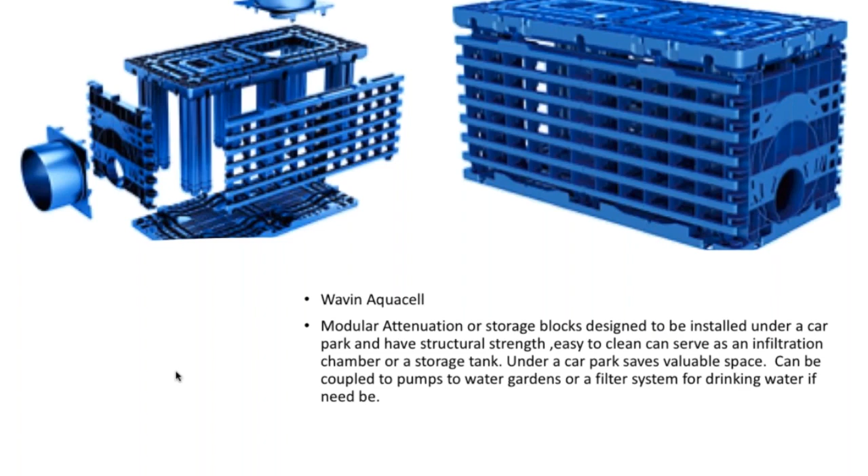What would you do with the water once you've collected it? Obviously, you need to clean it. And there are a lot of people who make very, very high-end and good water filter systems. I know that one of the IOPSA members is a company called BWT that makes very good treatment, so that you can either treat rainwater or sewage back to eventually drinking water, or if you don't treat it quite so far, you can treat it to grey water and use it to flush toilets and wash down areas, things like that.

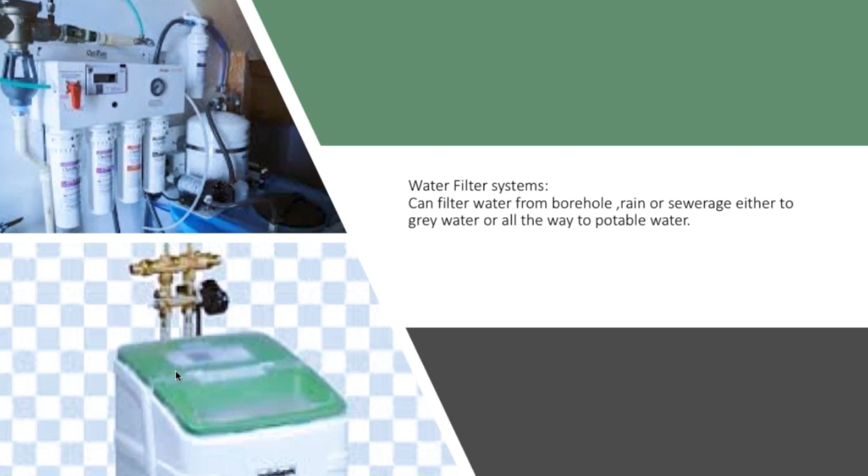So it's just a question of embracing these new technologies and offering them to your clients, because I can tell you that installing a water purification system gets you a very happy client, and the savings and the convenience of having grey water on hand to use to wash down flooring or to flush toilets, that sort of thing, becomes a very worthwhile cause in the plumbing industry.

We also then can offer comfort offerings. Comfort offerings are things like heating and cooling, and making your dwelling space better. So what's becoming very popular in Europe, and to a lesser extent in South Africa, is underfloor heating, but then heating and cooling. So with traditional underfloor heating, we would put the pipes in the concrete slab underneath your bedroom, and we'd pump hot water through it, and you would heat your building like that.

With radiant heating and cooling, we rely on the radiant source of heating, and by putting the pipes very close to the surface, we can cover those in plaster or ceiling boards, and we can make your ceiling board or your wall into a heating or cooling surface. This becomes a very efficient way to run your heating and cooling systems. It takes up very little space.

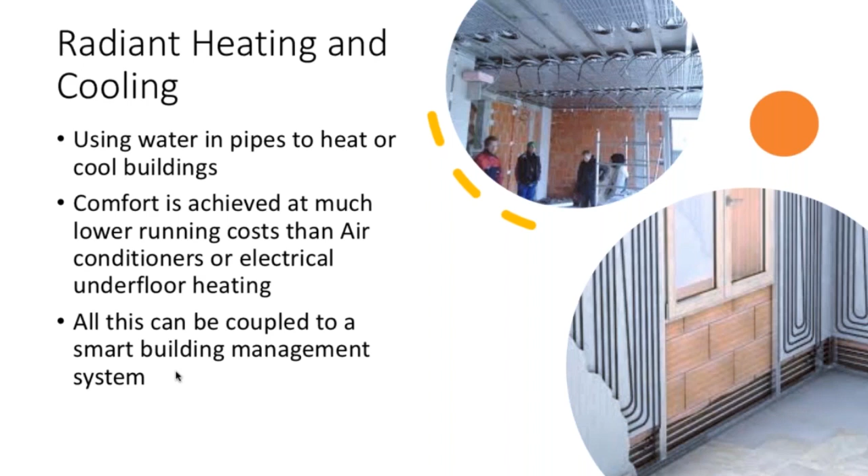It's a very energy efficient way to do it, because we don't have to shift huge amounts of air or water, for that matter, to heat or cool the building, and it gives a very high comfort level. All of this can be coupled to your smart building management system. So once you've got your building management system working correctly, you can turn this on and off. When you're traveling, you can turn it on the day before you get there, and you'll come home to a beautiful cool building or a beautiful warm building, and it all ties in with your smart building systems and is very, very easy to control.

We then also have things like waterless traps. Waterless traps are ideal, especially in very hot areas where they have low usage, because they will never dry out. This particular picture is of a HepvO, and there were 2,000 of these products put into Soccer City, and they never ever get a smell, because when they don't use the building for a couple of weeks between soccer matches or between concerts, there is no water to dry out, and there is no trap to dry out and make a smell. So it eliminates the possibility of a trap drying out, and because of that, it also eliminates the possibility of smells entering the building.

It also is becoming very prevalent, and if you read the news reports about plumbing, they've identified that at the moment COVID is also being dispersed or transmitted through bad venting in systems, because the traps are dried out and because products aren't being used. The pathogens have been able to creep back up the drain and be vented into buildings. And if you do read the news, there are a couple of case studies they're doing at the moment about how COVID and other diseases are entering dwelling spaces through the failing of traps and drying out of traps.

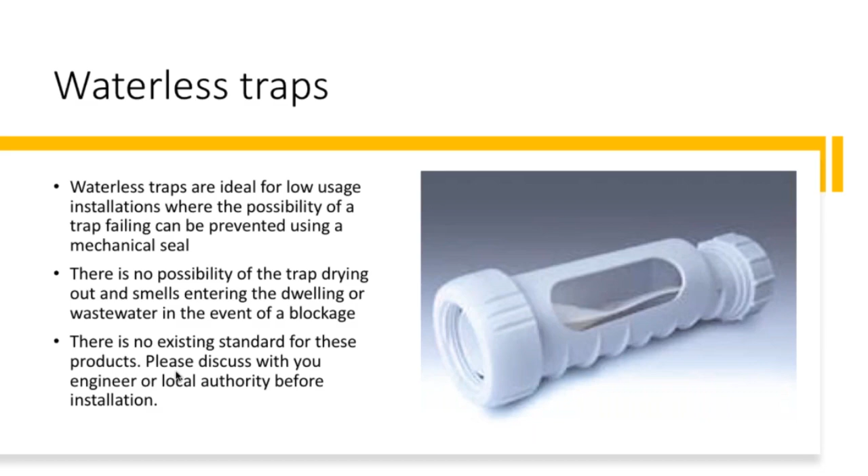As I said again, please guys, a lot of these products don't have approvals, so you just need to discuss it with your engineer or local authority before installing something like this. The next product that's certainly gaining some traction in South Africa is point of use filtered water. There's several varieties on the market at the moment that I've seen in South Africa, and a lot of people are going for this sort of thing in upmarket houses and semi-industrial kitchens.

It's basically a tank of some sort, either installed underneath the counter or on top of the counter, that when you push normal tap water through it, it filters it. Several offer hot or cold options. Some even offer sparkling water as an option, and it's on demand, it's not storing the water, so there's no chance of bacteria growth in the water, and it's a very convenient way of doing it. And again, if you can get into something like this as a plumber, it's an offering that maybe quite a lot of plumbers don't have available yet, and it gives you the edge.

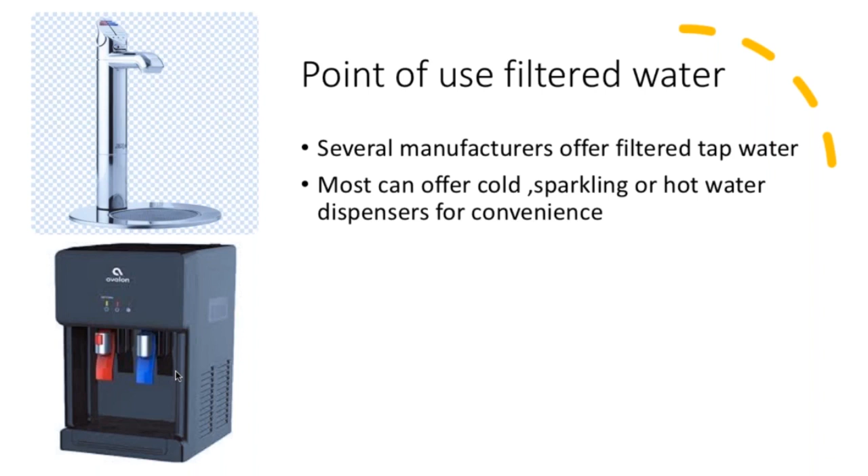If you're a plumber who specializes in kitchens, something like this is certainly something worth looking at as a plumber.

The other thing we also can look at is a thing called a hot water circulation valve, and this valve helps to balance hot water in a building where there are multiple loops. What often happens in an apartment block or a hotel is you have a centralized boiler system, and that is then pumped to all the different areas of the hotel. And because of the nature of water, the easiest loop stays hottest, and the longest or the loop with the most bends and most friction stay coolest.

This valve is installed on the return line of each leg, and when it gets to temperature, it closes, which forces the hot water to purge the next line, and when that line gets to temperature, it closes. So by opening and closing several of these valves in a system at a time, the hot water in the building will all stay at the same temperature, and the comfort of the building will be far better, and you'll have far less wastage of water because all the hot water will be available as you turn on a tap.

In the olden days, we used to use a thing called a balancing valve. We used to have to try and manually balance each loop. This valve now does it all for you. And again, there are a couple of manufacturers who've launched this sort of a valve or very similar.

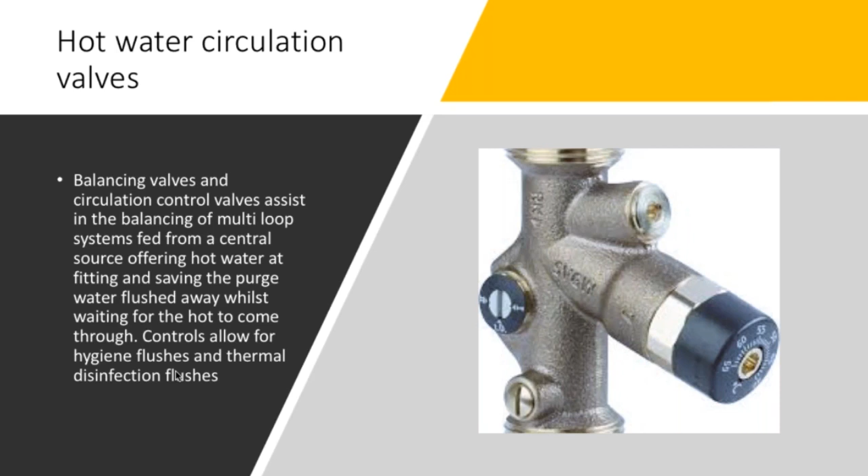And depending on how far you want to go, you can also link this to your building management system, so you can use it to do thermal disinfection. In a hospital, you might want to turn the temperature up to 90 degrees every second day or something at midnight, and these valves let you do that sort of thing, and you can have thermal disinfection happening in the pipelines.

The other sector that we need to look at is repairs and maintenance, and one of the big ones at the moment is pipelining and trenchless replacing of pipe or repairs. I know there are a couple of members of the Institute of Plumbing, and if you need any details, you can definitely contact me afterwards or contact IOPSA, and they'll put you on to the guys who are already doing this. These guys have made a very good business out of this, and it's a very nice thing to be able to offer your clients, and it's really useful if you don't need to dig up paving or chop up tiles in a building, if you can reline it.

And if you look at the picture before and after, you will see that they take an existing pipeline, they clean the inside, and they either spray a polymer or insert a polymer into it, or they can pull a new pipe through in certain places. They can rip out the old pipe and pull a new pipe through at the same time, so you don't have to dig open a road, for instance, if there's a drain underneath it, or a foundation if the building goes underneath. Trenchless repairing is becoming almost a niche in the plumbing industry, and people who specialize in it are very busy.

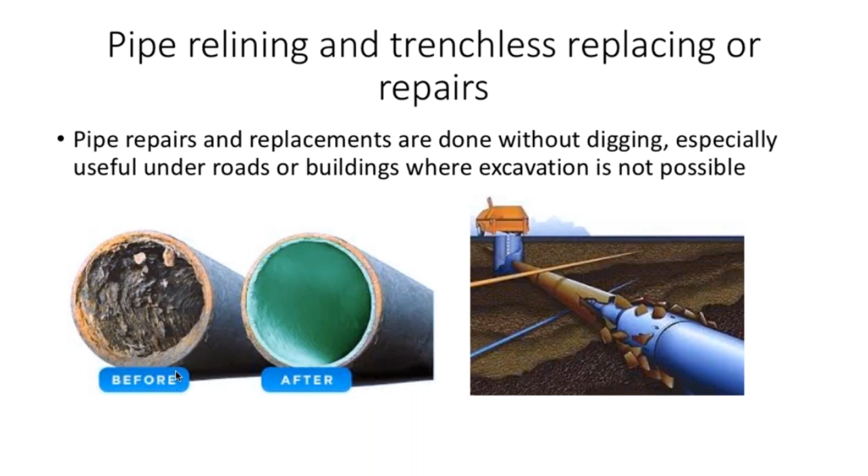The other thing that is also becoming very important, and again, people who can do this can start to offer far more reports and data to their customers, is data logging. With the way the internet and cell phones are going, it's becoming easier and easier to install a smart meter, or a meter that can do more than just measure the water flow. It can log the times when the flow is greatest, when the flow is least, and from that you can start to charge your customers according to when they're using the water. And if you put it onto the hot water systems in a building, you can charge the customers for the energy they're using as well as just the water.

So a lot of buildings have a central boiler, and in the olden days you used to measure hot and cold water, but now we can actually measure the temperature coming in, temperature going out, and the time they're using it, and you can allocate times so that you can try and balance when everybody's showering or using hot water in an apartment block, and charge them more at peak times and less at lower times, which then creates times for people to shower and make sure they're using the hot water at a more balanced time.

And ultimately, you can also then set your boilers and your heat pumps so that they are creating the hot water at times when you need it and not wasting energy by creating hot water at times when it's not getting used. In Europe, they measure the water going into the building and out of the building.

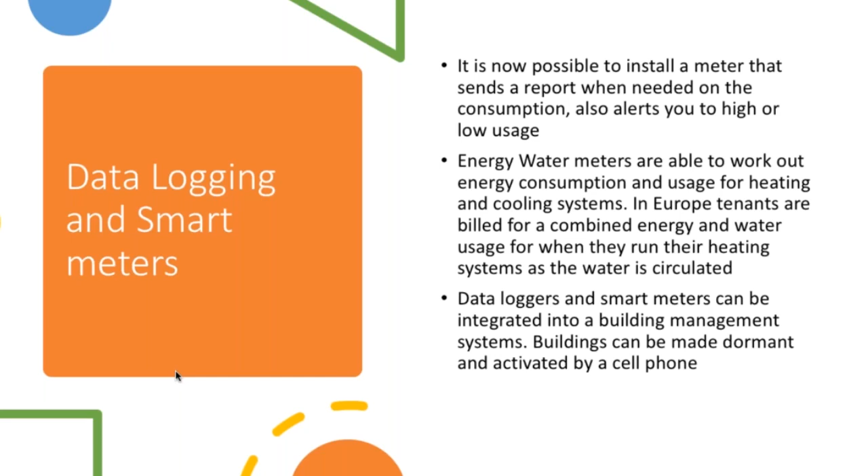Then all of this has to be brought together, and the way that architects and designers are bringing it together is with BIM Revit modeling. So building information modeling is the new way to design buildings, and in Europe by 2021, all public buildings will have to be BIM designed and modeled before construction commences.

My brother is in the architectural industry in the UK, and for every single building they have to give a full walkthrough with their clients with BIM Revit, and they can even plug in the GPS coordinates and let the client know when the sun will be shining on a certain part of the building during the day and in the afternoon and that sort of thing.

But BIM also lets designers use the correct dimensions for the product. So if you're a pipe supplier, you will create BIM objects of your pipe, or if you're a toilet supplier, you'll create BIM objects of your toilets, and it'll be down to the last millimeter, and the architect can then place your toilet in the building with the tiles, with the pipes and everything, and check from a dimension point of view that everything fits perfectly.

With your pipes, you'll be able to put your pipes, the air conditioning pipes, the electrical cables, everything into the duct, and they will be able to ensure that everything fits in the duct before they start working. And if not, they can redesign the duct to make sure that the duct or the wall, whatever, will fit it. And the client can do a full-on walkthrough and check that everything's right.

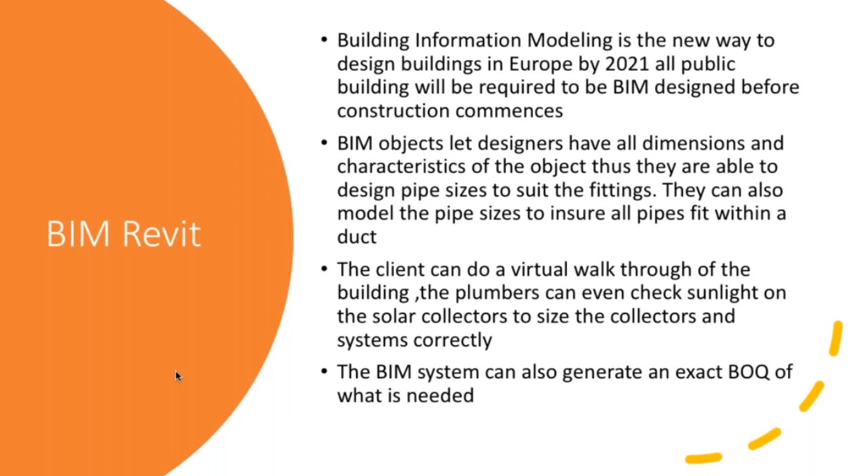And also, if there are changes in the building, you can change it on the BIM Revit plan, and it'll help your plumber and everybody fit in with each other. Down the line, you will have picked up the problem before it becomes a problem. This is just a couple of pictures that I've taken off the internet, so you can see how it designs and how it will work out.

And it'll even, with pipe, for instance, when you've had to use reducers, work out what reducers are available in the catalog and put the reducers in so that the reducers fit and work correctly. So if you're doing drainage and you need to go from 160 to 50 mil, it'll put the 3 reducers in that are available in the catalog, and it'll design it like that, so that when you come to do the BOQ takeoff, everything will be exactly right, and it won't just be one reducer. It'll be the number of reducers you need and the angle of the bends and things like that you need. BIM will also stop the designer designing products that don't exist.

So when he comes to do a bend and he needs to do a funny angle, it'll only let him use the products that are available. So it'll be a 45 junction plus a 22.5 bend, whatever it is. It'll let him use the bends that are available. It won't let him design an angle that's not available.

It'll break it down to the number of fittings you need. And then you get a very accurate finish up at the end, and it makes the plumber's life very easy because he can see exactly which pipes he needs to put in and where he needs to put them in and when he needs to put them in.

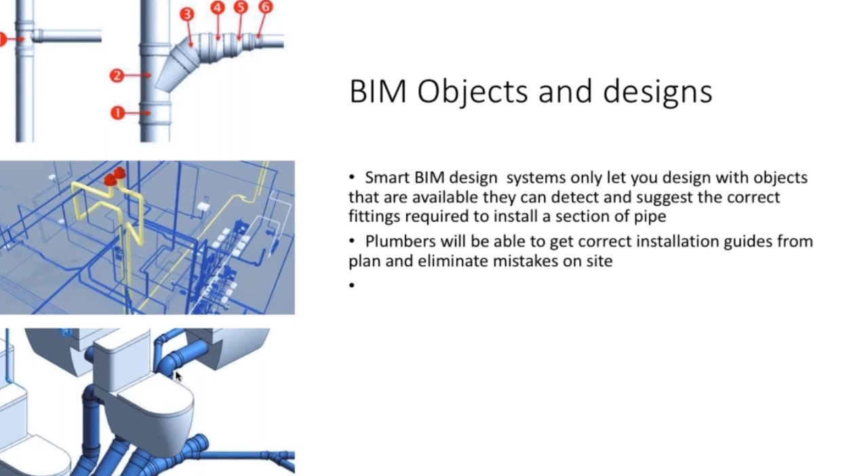So this is the way that the architectural plumbing construction industry is going, and it won't be long before, even down here in South Africa, we are forced to use BIM Revit on all sites. I know a lot of the big architectural firms are already using it and are already making use of BIM objects and catalogs and things like that on site.

Finally, this brings us all together to have intelligent controls. It's already happening. We can turn on our houses from a telephone. We can turn on the lights. We can turn on the Wi-Fi. We can let people in. We can do all that sort of thing. I mean, a lot of you guys will know of Amazon. You'll know of Siri, that's on the phones. And they offer a thing called Alexa or Siri and voice activation. You can turn on your house. You can turn off your house.

I have a cousin in America, and when he tells Alexa that he's coming home, the vacuum cleaner gets sent out and it cleans the house. It turns on his heating and cooling. It turns on the geysers. It turns on the lights, and when he comes home, it's like somebody's been in the house already to turn on everything and get everything working before he gets there.

He travels for work, and after 2 or 3 weeks, he'll come home and the house will be warm and cozy, and all the lights will be working and that sort of thing. And it'll also troubleshoot if something's wrong while he's away. He can get the plumber, or we can get someone to go and fix the house while he's there.

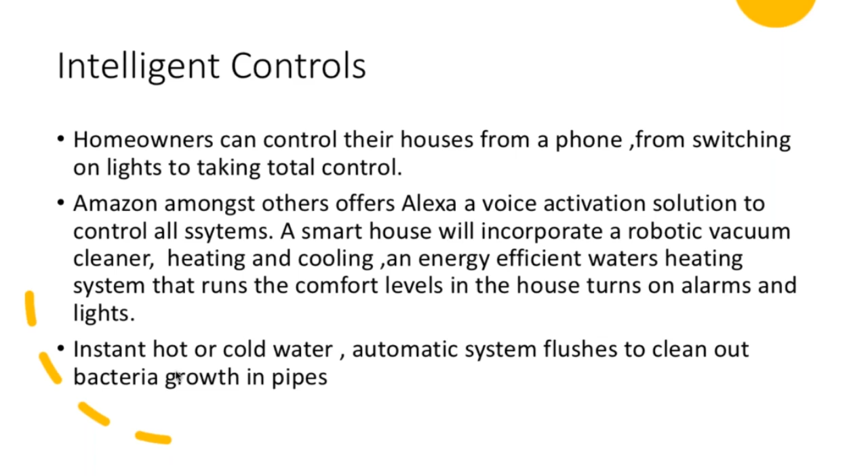It can also, as I was mentioning earlier, purge the hot and cold water system so that you have clean pipes with no bacteria growth, and your comfort levels will be vastly improved, and you will have a very comfortable house. This is where we're going with dwelling space in the next couple of years. This is where people are going to want to be.

So this is just a broad overview of what opportunities and what technology there is out there for plumbers. I would seriously suggest to the plumber you use the internet to your advantage and subscribe to a couple of those sort of YouTube channels, Instagram, LinkedIn, those sort of channels. Look what products are out there, what inspires you, what you think is a worthwhile thing to do in your field, and become that specialist.

And then also invest in yourself. I haven't even touched on the new tooling that's available now. And if you can buy some of the tooling that's available now, it's the smartest investment you'll ever make. And if you specialize in the future of plumbing, it's all about making you a wealthier, healthier, and happier plumber, and you can charge a higher fee.

Just like with medicine, your GP charges far less than the heart surgeon, because a GP, whilst he's a very intelligent and qualified person, is not the specialist. And the same with the plumber. We'd all like to believe we're good plumbers, but the guys who are going to really make the money are the guys who specialize in a certain niche within the plumbing industry.

And again, it's time for us plumbers to create a value chain within the industry, so that once you accept you're not a specialist in everything, you can pass on the work to the specialist, and he in turn will pass on work to you where you specialize, and you can create a huge value chain and a niche in this industry to make a serious amount of money if you can get it right.